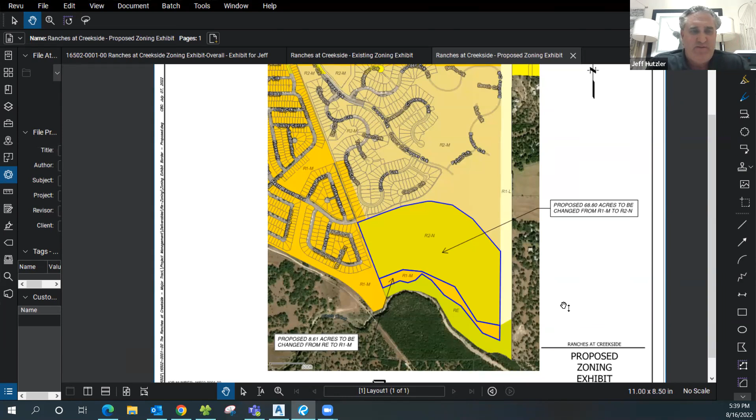What that entailed was, we have a mix of 55-foot and 65-foot products here in the Ranches of Creekside. It's been that way from the beginning. Now that we're developing some of those areas along the eastern boundary line, we are platting some of those 80-foot lots, and on this exhibit, that's the lots in yellow all along that whole side. We've got a 25-foot buffer. We've got the larger lots just because we've got some of those adjacent ranchettes.

And those are going to remain, correct, Jeff? Those are going to remain. We're not proposing anything all the way down to the creek. Those are all going to be 80s. We don't have any intention to do that. Our goal is just to get

that R1M over to an R2N, and just kind of some background on what we've done thus far. If you look at our Unit 1s through Unit 4 so far, we do have the ability to build 40-foot lots, but we have no desire to build anything that small. Our smallest lot is 55-foot wide. We have a mix of 55s and 65s where our average lot size is over 9,000 square feet collectively between those two. So we far exceed the minimum of 5,400 square feet and 4,000 square feet that the zoning allows in the existing part of Ranches at Creekside.

And we pretty much want to take that to the southern portion. Our desire is to build the same kind of consistent mix of 65-foot products along the natural channels there. Those lots that back up to the buffer along Cibolo Creek will all be the bigger 65-foot lots, but we just want the ability to have Highland, Perry, and Sitterle continue building 2 product lines in the ranches, which is that 55 and 65 foot product.

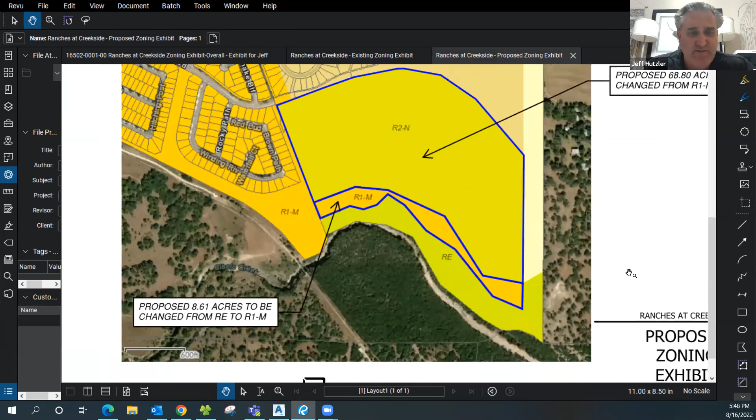There is a little bit of articulation for those 65-foot lots, just cleaning up some of the edges of that big broad line that was, I guess, painted on there when the original zoning was put in place. There is a little bit of articulation just to get that edge exactly where this plan matches the zoning. So if you can put up the proposed zoning, Courtney, there's a little bit of articulation in there, just to get those 65-foot lots kind of cleaned up, that edge tightened up, firmed up, so that the land plan you saw on the previous screen matches exactly what the zoning is.

I think, like I said, the square footage is no problem since we build really big lots historically. It's just the frontage. All we're asking is a change in zoning to allow that frontage to be a little bit narrower, but still build larger lots, and actually fewer lots.

I'm going to let Laura explain, because she does a better job than I do, about the zoning. Each zoning has very specific criteria for frontage requirements, and you can't be smaller than certain frontages. So that's the reason for the rezoning, they'd like a little more narrow frontages, which kicks them into a different zoning category. That's putting it very simply.

But Laura, can you talk about the difference between the two zonings, specifically the lot dimensions? Then we'll open it up to everybody's questions. Based on the approved master plan, as he was saying, like the orange area, Courtney, can you open the approved master plan please?

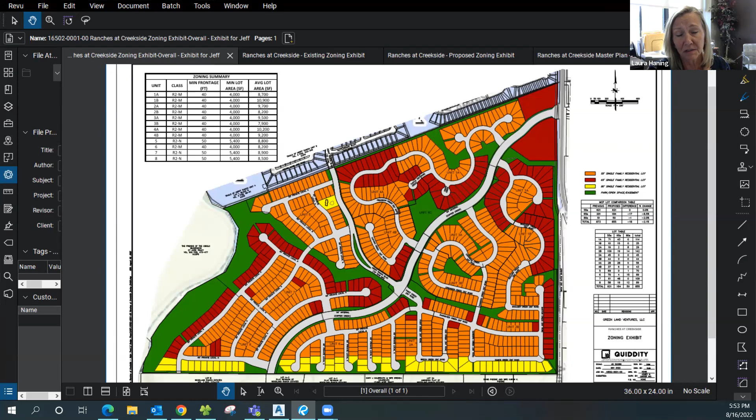On the percentage side, the city has spreadsheets for a bunch of different developments, tracking the percentage of this development approved by city council and how many lots in each category have been approved, to make sure that when it's all platted and developed it matches what was approved by the master plan when the whole thing started. If any of you have been around long enough, there were some revisions at one point, and that's a whole separate process to go through a master plan update. They don't need to do that here because it follows the current master plan.

It's just a matter of the appropriate zoning so they can get the frontages that they need. So the master plan itself, other than reducing some numbers, but that's less than the 10% overall, which is another requirement in the ordinance, they're not changing anything on what was approved for the master plan.

So let's open it up to some questions. There are a few questions in the chat. If Jeff or Courtney can go over and look them up, or if whoever asked the question wants to unmute themselves and ask it, feel free to do that as well. Yeah, sure, you can speak if you'd like. I answered the 18 reduction one, reduction of total homes.

I'm trying to see the question. That was a statement, not a question. I think it'd be easier to just open it up and answer questions as they come in. Sure, we can do that. That way we can be a little more elaborate.

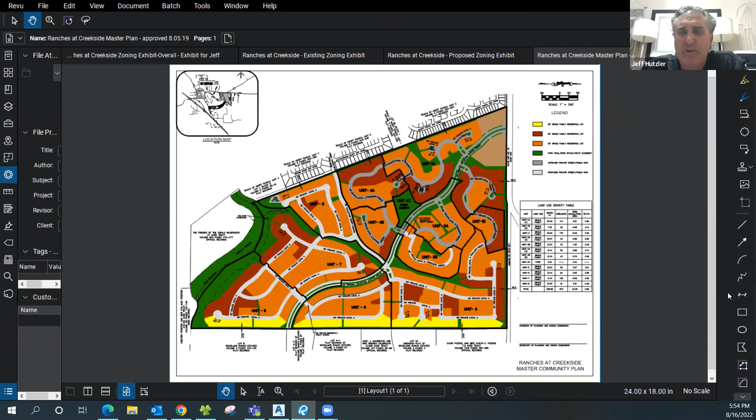This is Dan Bilski over on Boulder Creek. I thought I heard a comment about the reduction of the total number of homes from 873 to 855. Some of that space was to address questions and concerns the city had about width of streets, maybe fire and utility questions. And then did I also hear that there could be some new open space? I'm just trying to confirm that the reduction in total lots is what that space is really going for.

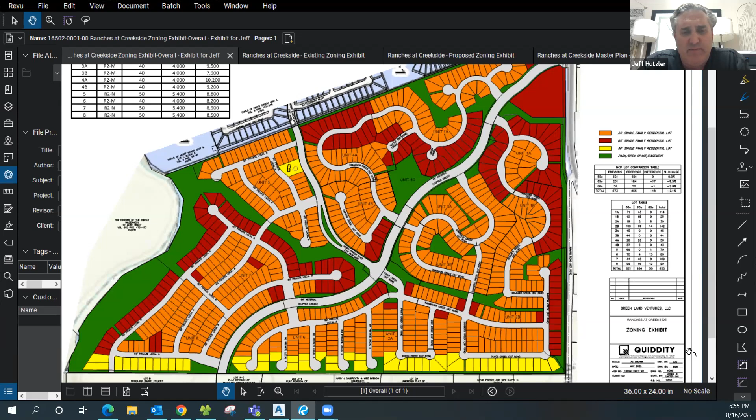The way the land plan goes, the original master plan just had big broad areas, an estimation. We had a coving plan that we kind of tried to follow. You can see the first few units look a little different than the back as we moved on. That coving was just very difficult to construct, very difficult to build utilities consistently, so we migrated away from that. That was when we originally had the approval, way back when we bought the land.

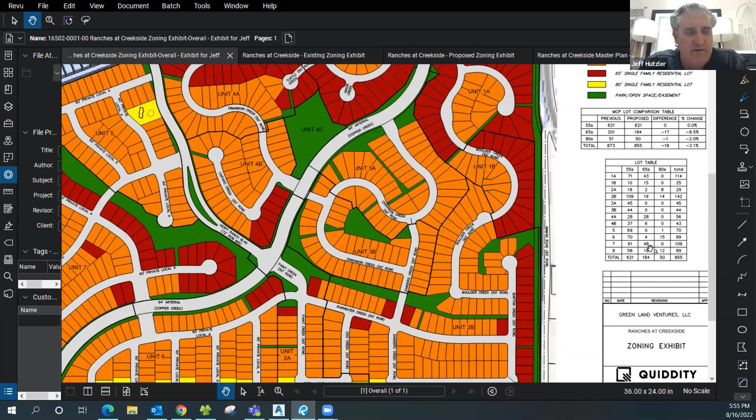We were around 898 lots as approved. Once we nailed down the lots, we were at 878, I think. Then we had some changes - we realigned Herf Ranch Boulevard, cleaned it up a bit to miss some larger trees and larger areas. That got changed, we went down to 872. So we're not necessarily putting 17 lots back into the mix, but when you put the land plan together and start the design process, you realize utilities need to be connected. You have lots, lows, and streets where you need to discharge water and get it to the natural corridors. You start losing lots pretty quickly once you get into that.

Okay, that answers it. Another question quickly - access to this parcel, is it coming in from Herf Ranch Road and Copper Creek? Is that the only two entrances?

Yes, those are the two main entrances. Are there going to be any others that the city's going to try to do, maybe closer to Almond Road? I mean, 855 additional homes on both Herf Ranch Road and Copper Creek is going to add a lot of traffic. No, Copper Creek and Herf Ranch have been the only two proposed since the inception of the project, about 8 or 10 years ago.

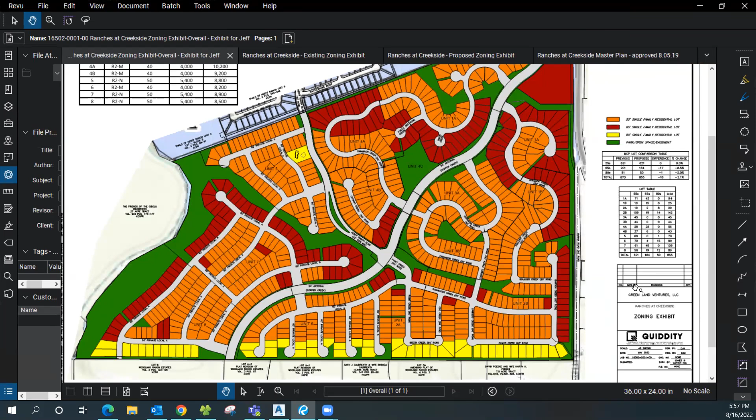I think in the past there was some discussion originally about connecting to Almond Road, but there is no connection to Almond Road. There's not one proposed, and we have not approved anything. Along with that, it looks like Copper Creek dead ends to the east. Can you tell us a little bit about that road and why that isn't a cul-de-sac?

So I'll try to explain that, Jeff. On the city's thoroughfare plan - this is Copper Cove, is that what it is? I'm sorry, I should know - Copper Creek. It's actually on our thoroughfare plan, and the idea ultimately is to make a connection further to the south, where traffic could come in off of 46, go through the subdivision. I can pull up the thoroughfare plan if I can find it quick enough and show y'all.

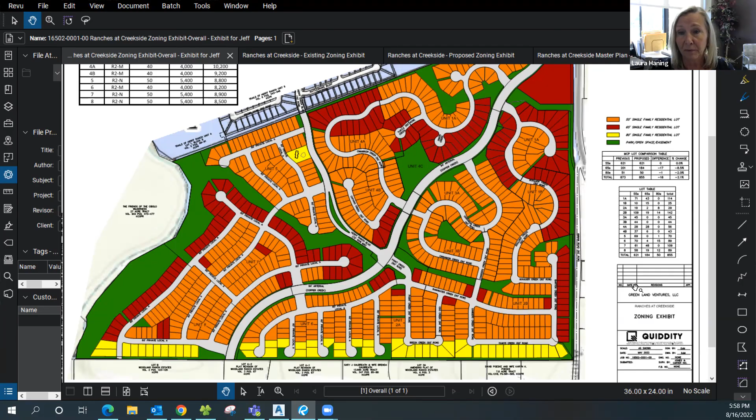That was in place prior to the development of the subdivision, so the city actually made them punch out to that point. Now, we haven't bought - we would have to buy property to push that road all the way through and have it go south and then over the creek. Ideally it would have connected with South Glen and then cut through that area down Cascade Caverns Road to I-10. That's a whole lot of puzzle pieces that have to come together - property owners have to be willing to sell or develop, and that's how we get roadway systems, but we plan for the future.

So maybe someday it will connect, but there's nothing in the works right now. That connection, that loop between South Glen and Ranches at Creekside, would require some development to happen between here and there.

Alan is talking about the first one, which is between our houses, and there is absolutely no road room between our two houses to put a boulevard. So since I live on that piece of land, are y'all considering turning right and then going down my property line and putting the road there to connect to the bottom part?